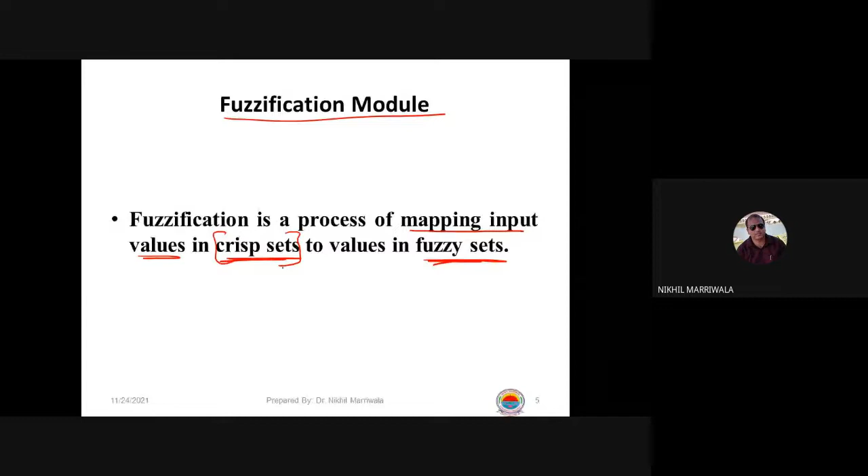So what we are talking about is the fuzzification module. Fuzzification, as I told you, is a process, and we will be using it. In simple terms, it talks about mapping input values in crisp sets, right? So again, I told you that we will be talking about set theory. So the input values in crisp sets are mapped to values in fuzzy sets, right? So fuzzification basically performs this kind of an action. The fuzzy sets are generated out of it, and then the next process is followed using this knowledge base.

Now, the knowledge base is basically divided into two halves: the rule base and the database. The database is something that we always keep on increasing and improving each day. It provides different types of definitions or linguistic controls, I should say. Say, for example, I say today's weather is very cold, right? So normally when I say this term cold, everybody can relate that we would require some woolen clothes to wear, right? Or we require something hot. So hot or cold, these are some linguistic functions.

Now, how the machine would understand these linguistic functions is one of the important aspects of fuzzy logic based systems, and how data can be manipulated using these values. So for somebody, a 20 degree centigrade temperature will not be that cold, right? For somebody who's staying in the very south, 20 degrees is a cold temperature, right? For people staying in the north, 20 degrees is a normal temperature because we are used to these conditions. So it can be cold for somebody, hot for somebody, moderate for somebody.

So how does the machine distinguish, and how does the machine help in this kind of a scenario? This is what we need to understand. And when you see so many situations coming into picture, you realize that this concept is something which is to be worked on, right? And fuzzy logic provides a wonderful solution to all these problems, right? Then comes the rule base.

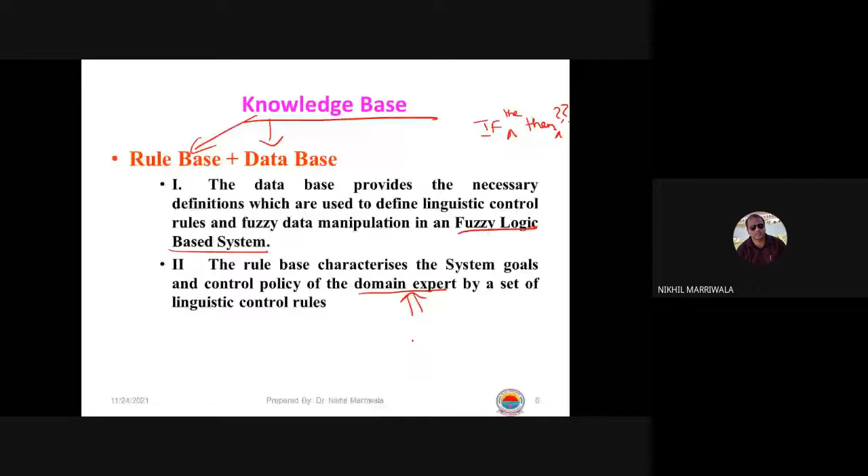The next important part over here is the inference engine. Now this is something that is inside the structure and manipulates the data that you have created. So this is just like a human brain. Whatever information is received, the decision-making capability is with the inference engine. So it performs the decision-making and then manipulates the data accordingly. As a human brain does, based on the inputs received from the fuzzifier and the set of control rules that it has, the inference engine aggregates.

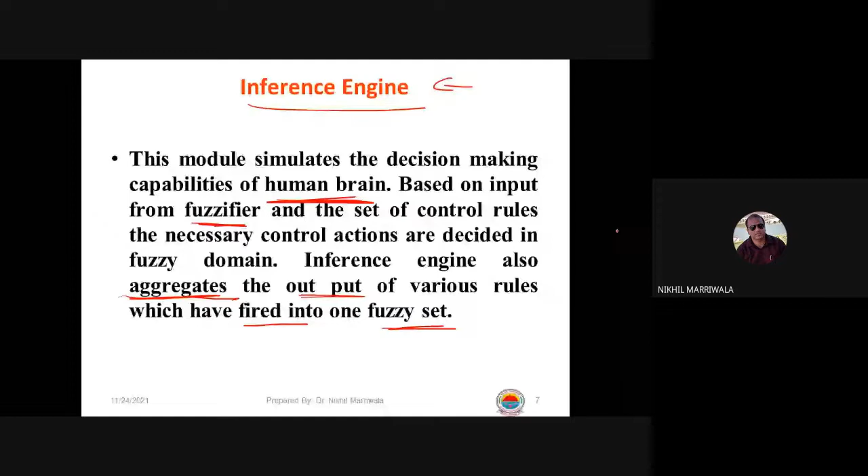So this is the word. It aggregates the output of the various rules, whatever rules are there, and which rules have fired into the fuzzy set. We will see what this firing is and what rules are used. So once the rules are fired, the last process is performing the reverse operation of fuzzification, that is the defuzzification module. Now, the module performs the following actions.

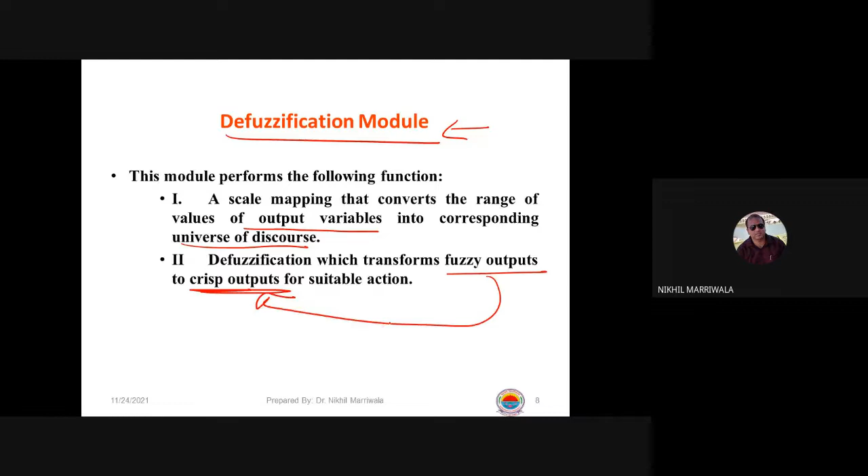A scale mapping is used which converts the range of values of output variables into the corresponding universe of discourse, and defuzzification is basically the reverse process of fuzzification. So it is transforming fuzzy outputs into crisp outputs. Earlier we had the crisp sets converted into fuzzy sets, right? Now this is the reverse operation, fuzzy outputs into crisp outputs, and that is what I wrote in the block diagram. You will be getting the crisp output for your purpose. I hope you have followed till this point, and if there is no doubt, I'll just move ahead.

So what are the different defuzzification techniques that you have? Different defuzzification techniques are center of gravity or center of area, center of sums, height defuzzification, center of largest area, and the min-max approach. So these are the different defuzzification techniques that are used. I still hope that you are following this. Anything you want to ask? So these are all mathematical functions.

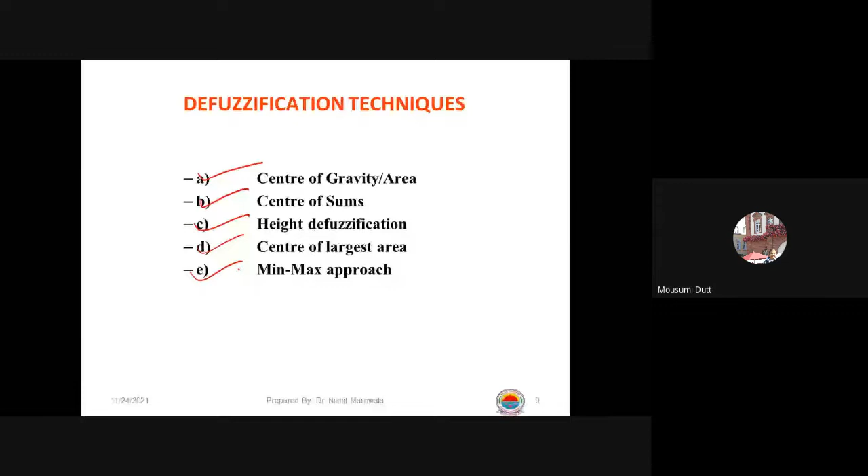I'm still waiting for some replies. I don't know why today you are so silent. You can talk to me. Yes, sir. Right, that's good to hear some voices coming in. Actually, they are writing in the chat box, responding there. Okay, I'm not able to see the chat box because my screen shows the PowerPoint presentation only. So I would request them to kindly switch on their mics. Participants, please unmute and respond.

So I need some answers from you. Can anybody just describe what a greenhouse structure is? Because you have heard about this thing. Anybody you can talk about a system of greenhouse? Anyone who can just give it in one line, or should I go to chat box to see the thing?

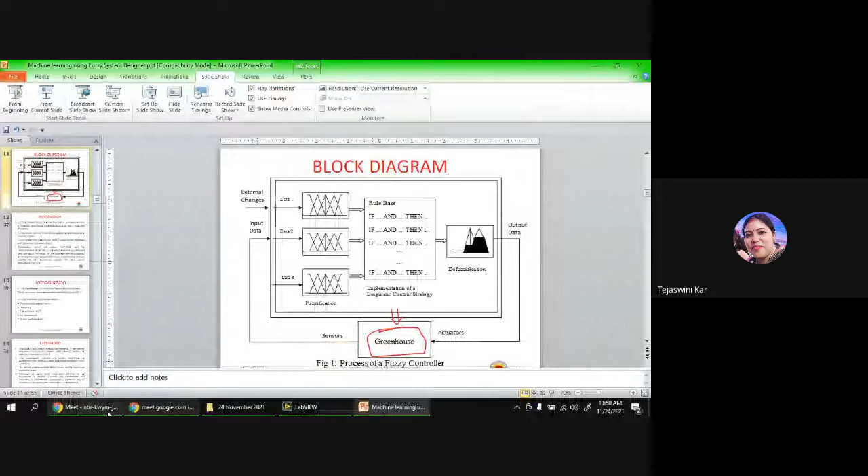A greenhouse structure. Okay, nobody is still answering. So I think the first lecture has hampered your. No idea, actually. No idea. Okay, no idea. Okay. I thought everybody must be knowing it. Nevertheless, okay, I'll just introduce this to you.

So the greenhouse basically is an enclosed environment, right? Again, I'll write it over here. It is an enclosed environment where you grow plants, right? So a man-made structure, enclosed structure, where growth of plants is basically the aim for us, and we provide a certain kind of environment where the plants can grow very effectively, right? So I hope you have understood that, and you have seen this around you. I hope you followed this now, right? Yes, yes, sir. Right. Thank you very much.

So, for this particular aspect, many theories have come how this greenhouse can be very effective. Say, for example, you are staying in a particular location and you want to grow mushrooms over there, and it is not conducive to grow mushrooms at that point, right? So, what you need to do? You need to create an artificial environment to make sure that the mushrooms or any crop is growing, right? So for that particular purpose, a greenhouse comes into picture and provides the solution. And this is what we are looking forward to designing today, right?

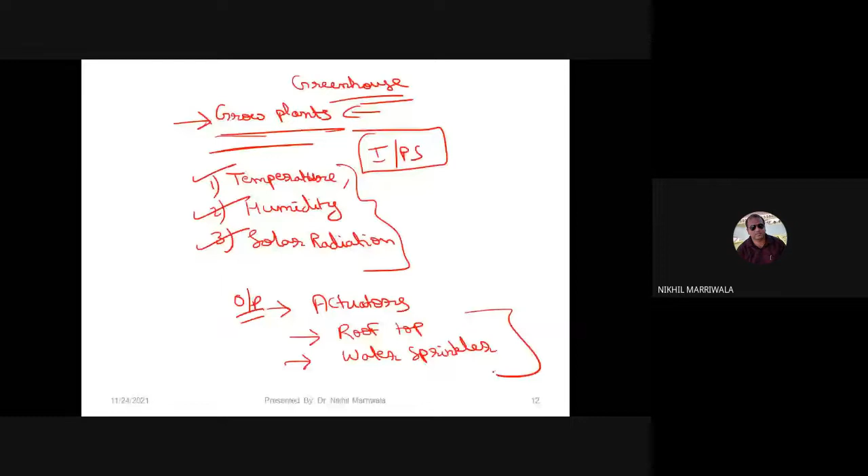So these actuators are what? They are basically, see, the roof of this particular greenhouse can be opened and closed for the solar radiation to come or the air to flow in, right? So roof top and the water sprinkler. These are two important things that are used in a greenhouse structure, and they will automatically be controlled by this fuzzy system designer that we are trying to design today, right?

Is it okay now? Have you understood the problem? Yes. Right. So what we are doing is we are trying to use fuzzy logic for solving this complex scenario of greenhouse structure, where we'll talk about temperature, humidity, and solar radiation as the inputs, and two outputs that have to be controlled, that is the water sprinkler and the positioning of the roof. Right. I hope you have understood this and you have followed this.

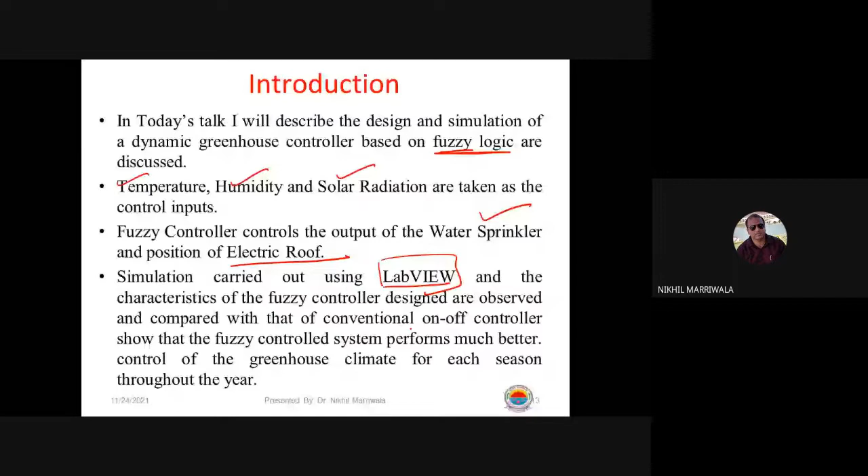Now we will be using again LabVIEW today to design this fuzzy system designer. We will be replacing the conventional on-off controller, right? Now I'll tell you that in greenhouse structures, normally there are people who control it, go with on-off controllers, and then the roof moves or the water sprinkler starts, right? So we are replacing it and we are automating the process using AI.

Now yesterday people were asking what is the difference between machine learning and AI. Now I'm trying to give you that, right? So we are implementing the technique, right? The artificial intelligence is being given to the machine, where we are referring to fuzzy system structure. So fuzzy is one of the techniques, right?

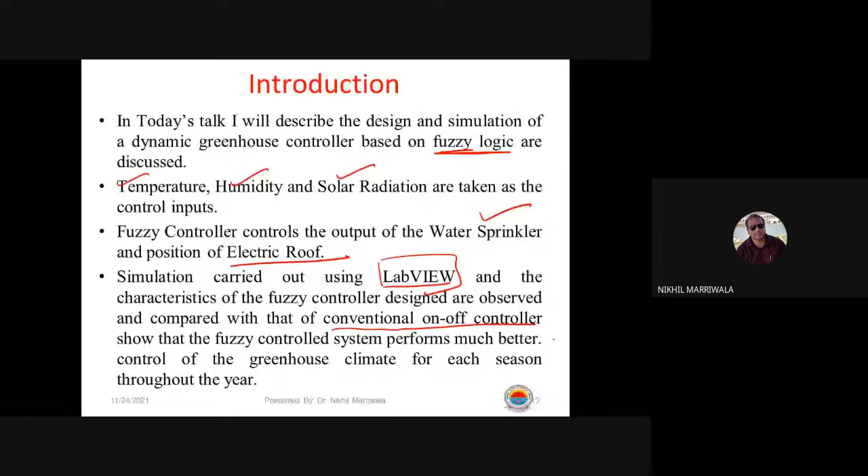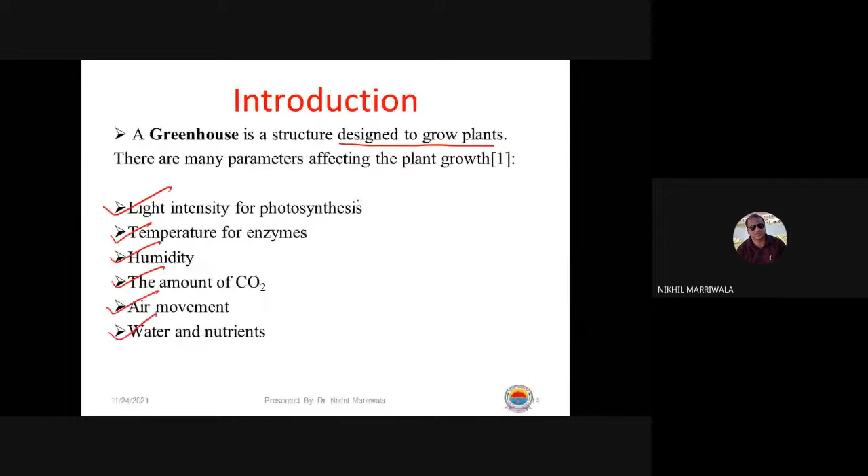So again, greenhouse is what? It is basically an enclosed structure designed to increase the growth of the plants, right? Many parameters I've already talked about: light intensity for photosynthesis, temperature for the proper growth of enzymes, right? Similarly, humidity, the amount of carbon dioxide required, air movement, water and nutrients. So all these are factors. How you can control it? Because we have already enclosed it inside a particular structure. So that is referred to as a greenhouse, right?

So why we are doing it? Because we want to replace the on-off system with an automated structure. This is a highly non-linear structure, very complex problem, right? Very complex in nature, because we're dealing with something living, right? So it is very highly complex, and we want to help the farmers to make sure that they produce good output, right? So we are using a fuzzy logic controller for this particular purpose, right?

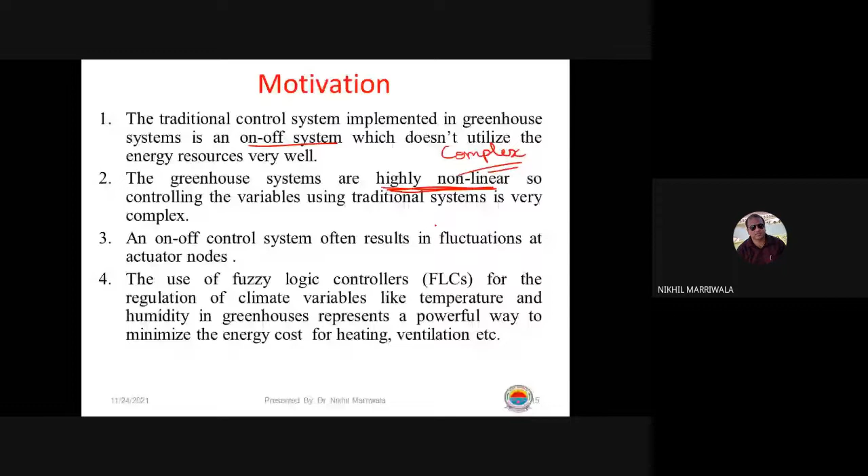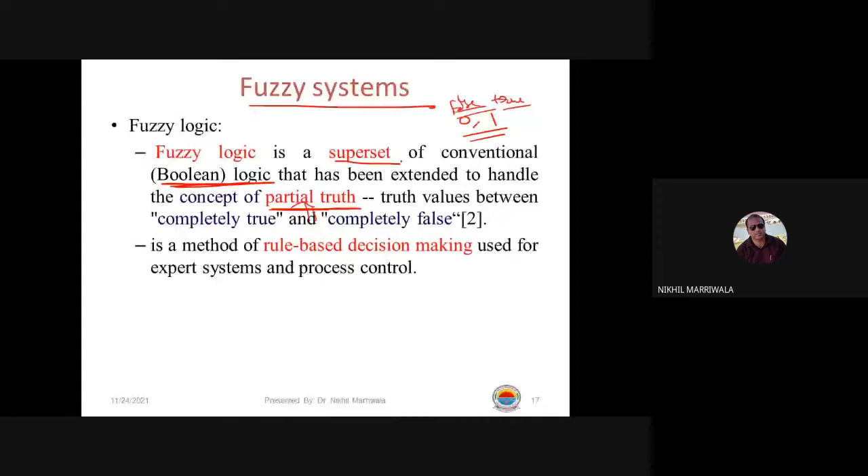So fuzzy logic basically, just a simple aspect, is a superset of conventional Boolean logic. I've already told you, right? The Boolean logic was referring to zeros and ones, but fuzzy logic would refer to intermediate values also. For example, partial truth, right? So this is called false and this is called true, right? Everybody knows this. Completely true and completely false, we understand. But what about partial truth and partial false, right? So now this is the problem. So this is basically why we are referring to these fuzzy systems, and they are very good in entertaining all these types of issues, right? So I hope that you will enjoy making these.

So I've already told you that we are dealing with linguistic variables as far as fuzzy logic is concerned, and these linguistic variables are very simple. Say, for example, in temperature, I talk about freezing, cool, warm, and hot. We will talk in these terms only, and you'll see that the machine would understand this, right? So this is the beauty of the system. Like speed is slow, normal, fast. So you can talk in linguistic fashion, and rules will also be made in linguistic fashion only, right?

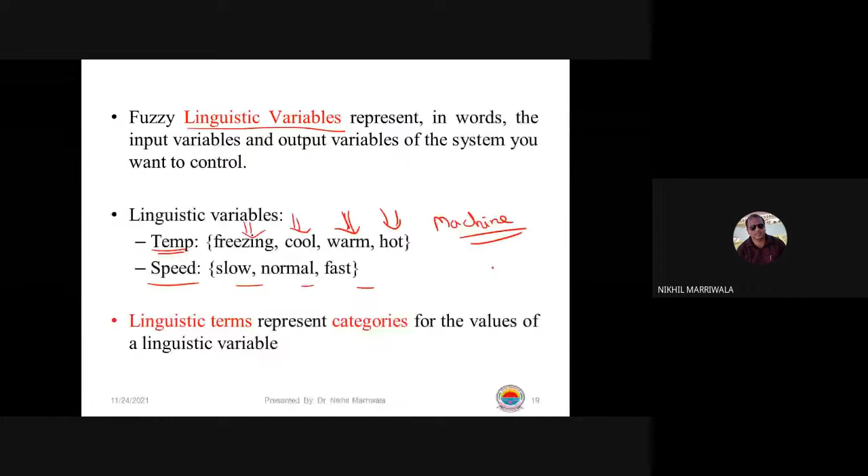Right. So what are the rules? Again, I told you, if-then. So if current temperature is cold and desired temperature is moderate, then heater setting should be low. Normal talk that we discuss among each other. Say today is very hot. So what do you want? We require an air conditioner, or we require a fan, right? So today is very cold. So what we require? We require this thing. Then this should be the output, right?

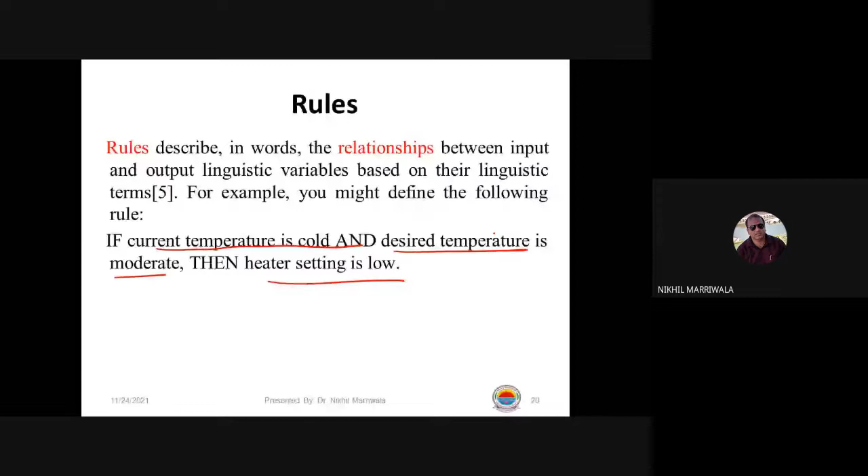We draw these kinds of systems, and then the outputs of this particular structure are selected according to the values that you have given, or according to the rule base that you have formulated, right? So we will be trying to design this structure.

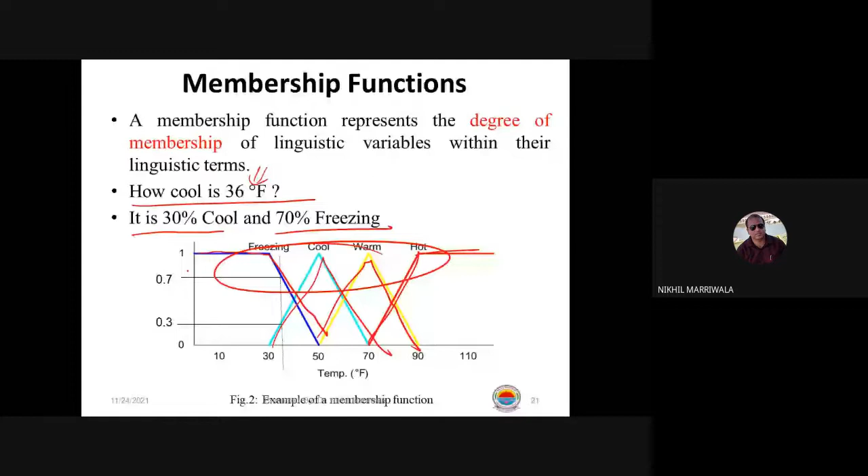Now what I'll do is straight away move to the LabVIEW part. I hope everybody has downloaded and installed this. I'm assuming this for everybody. Again, Control N would do what? Control N would do what? New VI. I hope everybody remembers that, right? Is it a very new topic for everybody?

Yes, sir. Okay, okay. So, thank you for answering, Tejaswini ji, for this particular purpose. But see, I'll make sure that it becomes very easy for you.

Bonda ji is saying one example for greenhouse structure, shade net structure. Yes, shade nets, but sir, that is not a greenhouse. So there is a difference. Again, I repeat, greenhouses are very big farms, right? You normally see on roadsides, people have developed some nets and are growing some saplings, right? So that is a very small structure, but they are not controlling the rooftop because it is basically enclosed.

Now, greenhouse is different, right? It is an automated structure where roofs can open, water sprinklers start on their own, right? And several other parameters can also vary in that case. So don't confuse it with the normal shade nets that you see. That is not a greenhouse. Again, I repeat, a greenhouse is a very big farm, and that too enclosed, where roofs can move, right?

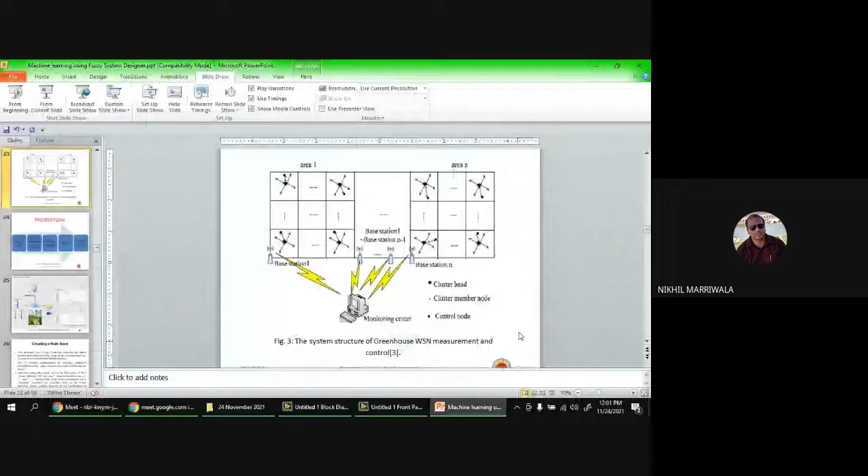Excuse me, sir. Are there any research papers related to this LabVIEW implementation? Yes, ma'am, I'll show you all those papers. But right now, I'm talking about the problem identification, right? So yes, there are many papers based on this. LabVIEW implementation I have not seen. In MATLAB it was there, but LabVIEW implementation we have not seen. Ma'am, there is nothing much to differ in MATLAB and LabVIEW.

Again, I repeat, MATLAB is good for those who love to code, right? But people like me who don't like coding prefer graphical programming. So is it like a tool which is easier than MATLAB? What do you think? Madam, again, it depends on your work. Say if you are comfortable enough in writing the program.

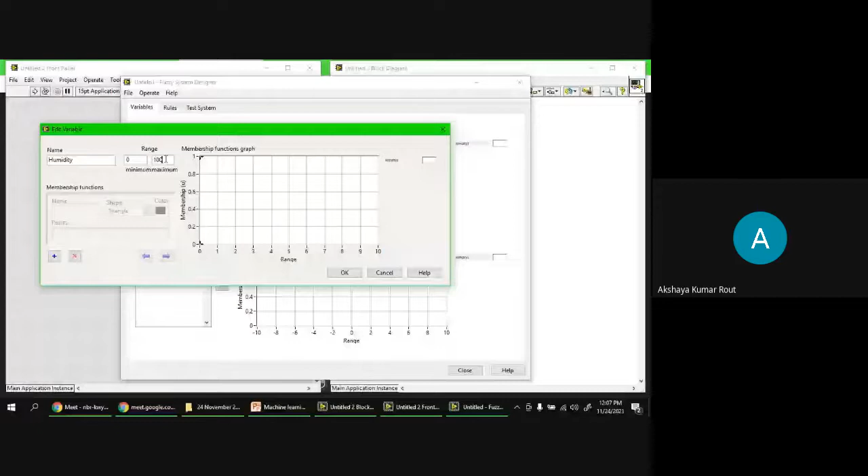Similarly, the second input variable was what? Everybody can answer this. I think humidity, right? So I need some yes and no from your side. Humidity. Is everybody available here? Yes, sir. Right, humidity, and the third one was solar radiation that we had decided, right?

And the range again from 0 to, say, 15,000. I'm taking this in lumens, right? So 15,000 lumens or even higher values can be taken. This is just the range. So temperature, humidity, solar radiation, 3 inputs. And what were the outputs? Output variables were water sprinkler. I hope everybody can answer this.

Water sprinkler. Again, I can take a range from 0 to 100, that is opening and closing of the water taps, right? And similarly, roof, electric roof. Why am I calling this electric roof? Because it is controlled by some actuators which are electrically controlled. So on-off controllers have to be replaced here. And I'm talking about the range of 0 to 100 again. This is just a rough idea. Now we have given the input variables and the output variables, right?

I don't know whose mic is still on, but if you want to ask something, you're most welcome. Akshaya Kumar ji, I think he's accidentally switched it on.

We have just given the input and output variables. Now there are DAQ cards by which we could have interfaced them directly, but right now we are taking these inputs. These input variable parameters are already available in that worksheet, right? Temperature, humidity, solar radiation, keeping in view this greenhouse. We have just selected them.

There are more parameters. You can add more inputs. But these are some of the parameters that actually affect the growth of the plants the most. So we're trying to design a system with temperature, humidity, solar radiation. I could have added carbon dioxide level also, CO2. Right, so you can add input variables, and you can remove them if they are not actually affecting that particular plant growth. Nevertheless, we've taken these three, and the two output variables used are water sprinkler and electric roof, right?

So now the next part is you need to give them some membership functions. This is what fuzzification is, right? If you have to give membership functions to temperature, like the way we were talking about linguistic variables, I click on add, and a membership function comes up.

A membership function is nothing but, say, temperature is freezing for me, in normal terms, freezing, right? There are different shapes I can decide for the membership function: triangular, trapezoidal, singleton, sigmoid, Gaussian, whatever you want. I just selected the triangular function right now, and freezing means -10, 0, and say 10 degrees for me. Just a rough idea, rough data. Okay, you got it?

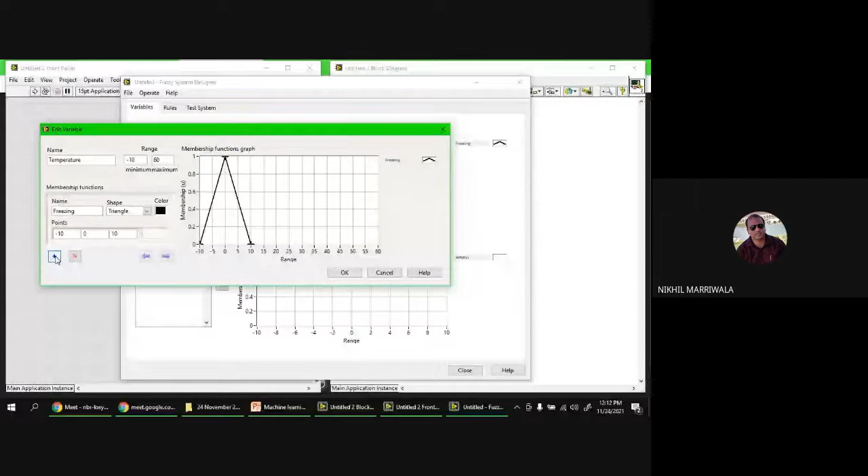Similarly, I can add another membership function. Now it is cold for me. So what is the range of the cold? This time I can change the color to make sure that the lines look different. Sir, excuse me, sir. Yes, yes, please, ma'am.

Sir, can you please repeat the utility of this membership function? What you said, ma'am? I just couldn't follow that. Can you repeat? Yeah, could you please explain this membership function? What are the utilities? Why we should include the terms as a membership function?

Ma'am, because we are talking about some linguistic variables to be introduced. So either you could have given real-time data to the system, right? Or you can talk about these membership functions where you describe what is the temperature, whether it is cold, normal, freezing, or warm. So based on those inputs, your system would behave. Do you understand that now? Yes, sir. Right. So we are trying to give that input to the system.

So one thing that we understood was freezing. Another thing was cold, and we have just used our database or our own knowledge to make sure that from -10 to 10 it is freezing for us, and from 5 to 25 it is cold temperature for us. So this must be cold for the plant also. Now do you understand that? Yes, sir.

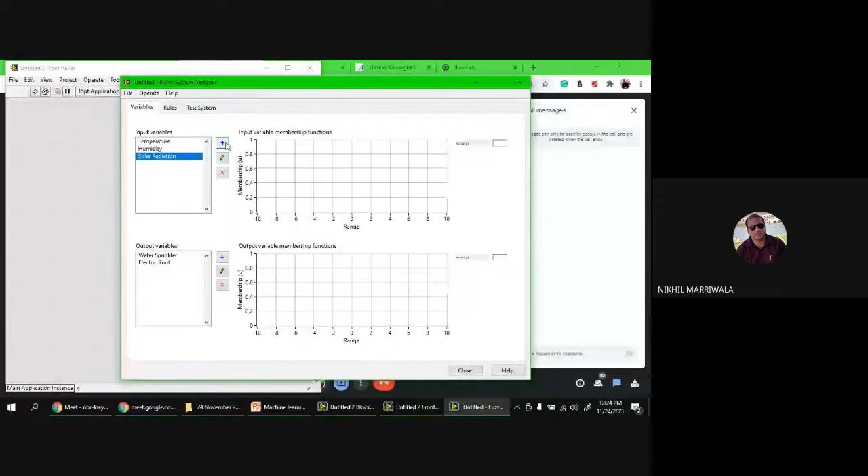So temperature and humidity have been given some values over here. Now solar radiation is the one that we need to work about. So what is solar radiation over here? Again, click onto this solar radiation: dark, medium, and light. So I take the variables dark, medium, and light. What is the range of dark for me? Dark can be 0 to 3000 lumens to say 5000 lumens. So this is dark. Then enough sunlight is coming, right?

Similarly, medium or moderate sunlight is coming. I can use any terms, moderate, and again I can make some color changes over here. Rather than typing, I can move this also; it can be a little faster for me. So I have taken this range as moderate, and then add another one to create high. So say I again set a Gaussian function, select this color over here. So this is high range for me, just a random value again. I hope you followed this.

So temperature, humidity, and solar radiation, according to our own knowledge, we have given some input membership functions according to what we understood, right? Is there any problem till here?

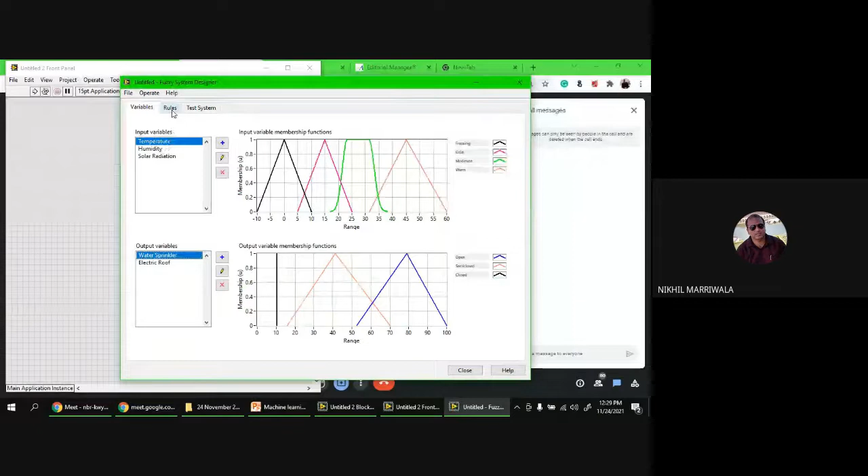So we have given the membership functions to all these input and output variables. So this is the main part that we needed to do. Now, if you've understood, I can move to the next step. The next step is very interesting, right? Now here AI, artificial intelligence, would come into picture because the complete data is there. Database has been utilized. Now I told you that we have to implicate these things, right? So rule base has to be created.

One way to create a rule base is click onto this add, and it says if temperature is freezing, water sprinkler is open, right? So you can change this rule to water sprinkler is closed. But where are the other antecedents? So you have to add them, right? Add them as if humidity is high, let's say humidity is low over here, and solar radiation is dark, or say solar radiation is moderate. Then what are the consequences, right? So this is how you make rules.

Again, it is being done by you people, right? Your intelligence. Now we don't want our intelligence to come into picture every time. You can create n number of rules, right? Clicking on to add, you can create n number of rules. But I don't want this thing. In this case, I delete all the rules, but I want the system intelligence now to come into picture according to the data that I've given it.

So the best part is go to operate, click on to pre-generate all rules. Now, this is the phenomena, pre-generate all the rules. And when you click on to pre-generate all the rules, you will be shown that 36 rules can be generated for 3 input variables that you have given, right? And what are the antecedents you want to use? That is and, minimum, and product, or maximum, or probabilistic.

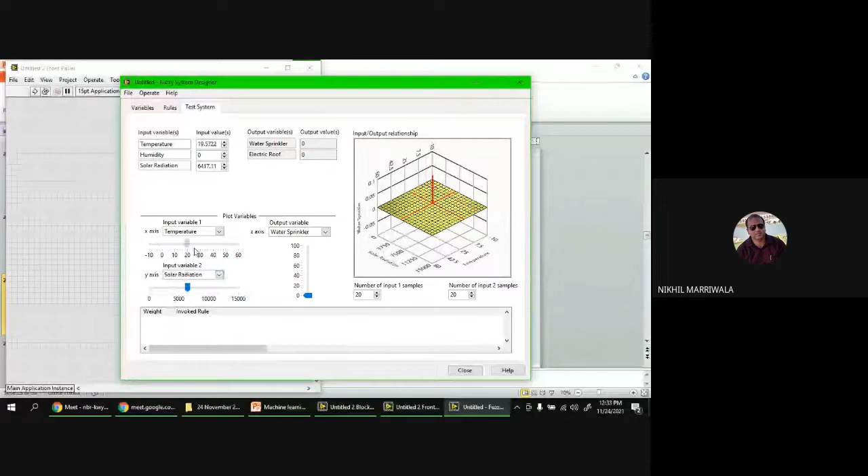The next part I need to do is move to this test system, and when I move to this test system, you will see that the 3 inputs and 2 output variables are shown over here, and you have the input variables and output variables over here, right? So how this thing would change, I'll just show you, right? So you're able to see the output part changing according to what we want. Are you able to see that?

Yes. Yes, yes. And in the lower half, you are able to see the fired rules, right? The rules which are fired according to the input values given. So you can change this input also, and you will see some values changing accordingly, right? Now this is the automated process.

Is it okay? So there is some weight also coming. Weight? Yes, yes. So it has computed the weight according to the input that you had given in the rule, center of area. Okay, that is automatically generated, right? That is automatically generated now. Right? Yes, sir. I hope you followed this.

Okay. Actually, the output variable is electric roof. So how is it interpreted from that output graph? It can be changed with water sprinkler also. You see the value changing over here. Right? I could not interpret actually how the graph indicates water sprinkler or rooftop. See, if temperature is 20 degrees and humidity is 65, then the water sprinkler output according to the rules that we have created should be at this point. Now this is being done automatically. I'm not controlling it. Now do you understand that?

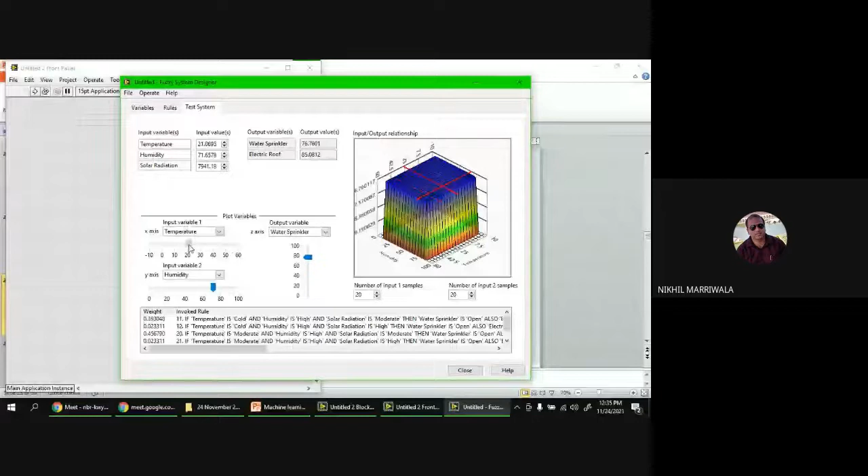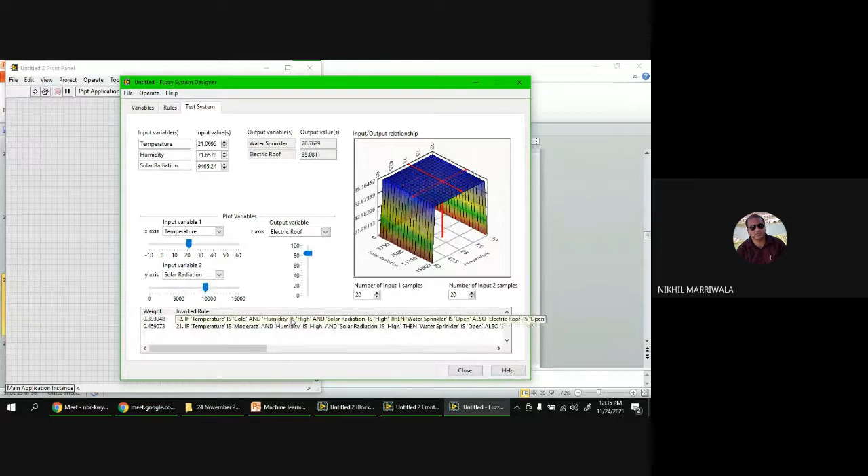Okay. Right. So if temperature is this and solar radiation is this, then what is the value of the electric roof? It is this. It will keep on changing. You see the value changing over here, right? Okay. And rules getting fired. Now, if you want to change something, you can go to a particular rule and change it. The electric roof is 80. So please, previous one. Previous. Yes, that one. Please go ahead. This one.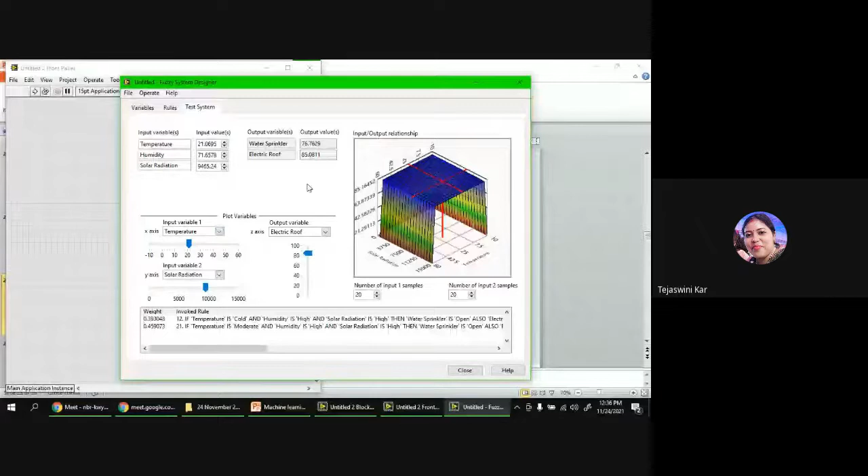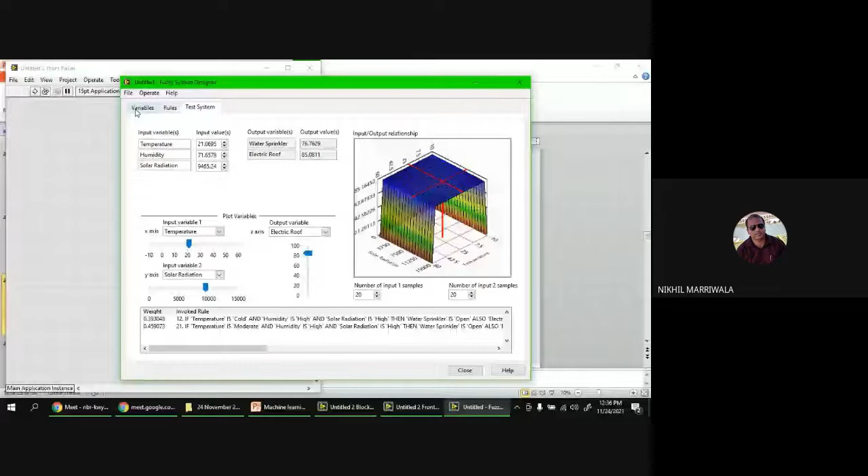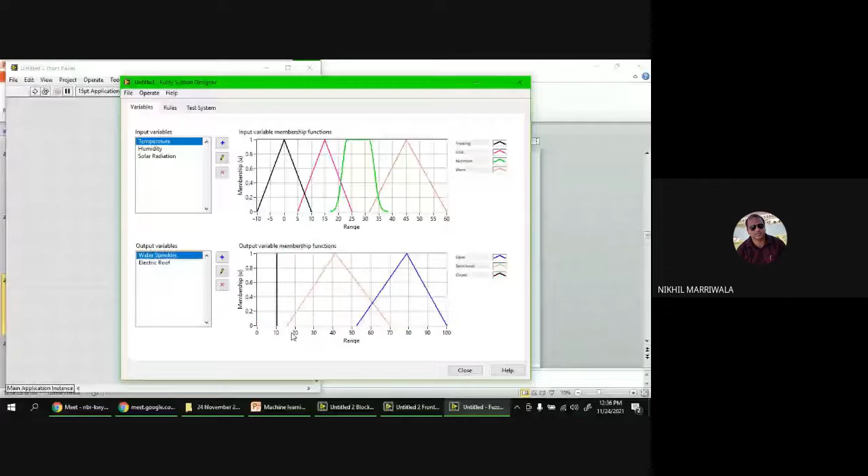Here, as it is indicating, electric roof is 80. What does it mean? Please see here. Here, we had given that electric roof 80 means a percentage of opening. Yes, yes, it is percentage of opening. Okay. Similarly, water sprinkler is percentage of sprinkling, the quantity of water. If it has to be, the valve has to be open or closed. Okay, okay. Thank you. Right. I hope you got it now. Is it okay? Yes, sir.

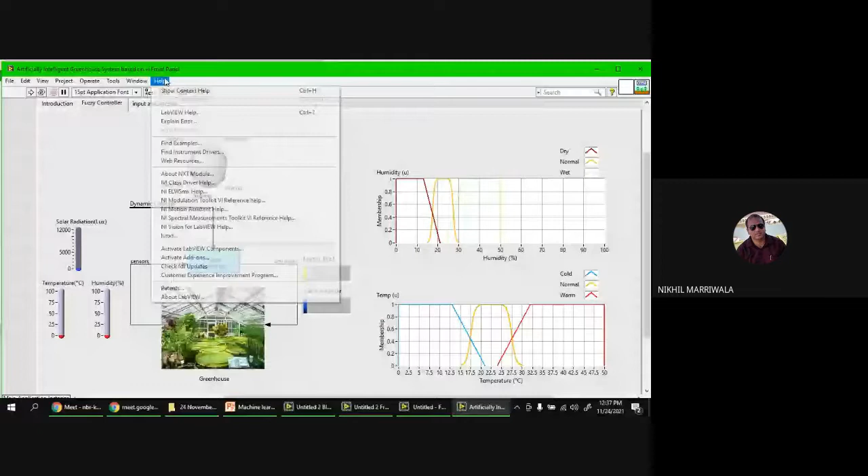Now I can use this entire information in the system and generate a system. Right now, what I have done for you people is I have created this particular structure for you. We have created this fuzzy controller because there are 4 seasons: spring, fall, winter, and summer. Before that, I can show you another example of similar sorts where I will control it in real time. Sir, you put a greenhouse image over there in your VI? Yes, ma'am. There is a greenhouse image. This image has nothing to do with anything, but it gives a good representation, and this can be easily done in LabVIEW. That is why we are using this software, right?

Okay, these images are already there, or you are importing it from some other source? No, I've just taken it from Google, ma'am. You can take any other image also, no problem. Any image can be imported and put here. Any image can be used now.

Okay. Right. Now I'll show you the implementation of the same thing that we have designed, right? So when I run this, just have a look. The temperature and humidity, right? I'm varying these two. I hope you're able to see the variation in the output.

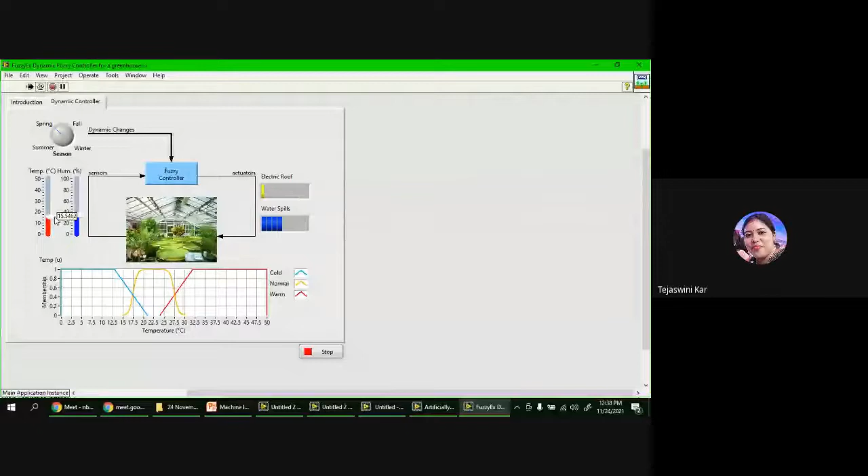Are you able to see that? Yes, sir.

As I'm raising the humidity, the water spills have to go low, and they are behaving in similar fashion. If I increase the temperature, the electric roof opens and water spill also increases. If I decrease the temperature, right? So they are behaving in this fashion. Now this was spring season. Now say the season changed to summer, and in summer season the temperature rises. Then what happens? So we're talking about some extreme conditions over here. So the output is behaving accordingly, right?

I hope you're able to see this. Yes, sir. I can change it to winter season. Temperature goes very low, humidity is still high. Then what happens? Or humidity also goes low. Then what happens? So you can all see this. In winter, say suddenly temperature crosses 20 degrees. So it is very high for that, so plant growth can be hampered. So if this is hampered, electric roof and water spills will play their part in this.

I hope you have followed this. You have understood what I'm trying to say. Any problems here? No, sir, it is fine.

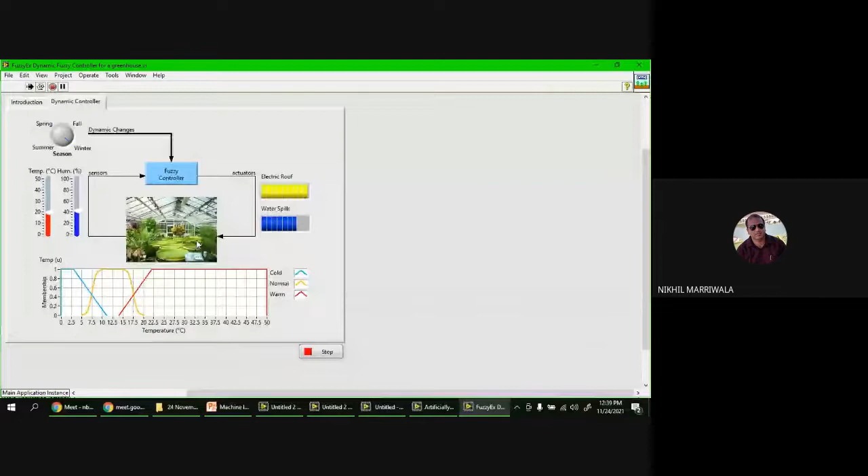Great. Now see, a similar thing can be done with a real-time system. The third input was missing there, this solar radiation. I've just taken it here. Now when I run this, I've just used a structure which is giving input from my fan over there, right? The humidity, temperature. You can see the variation happening as they are moving, and this is the output recorded. So this can be continuous monitoring of the greenhouse structure.

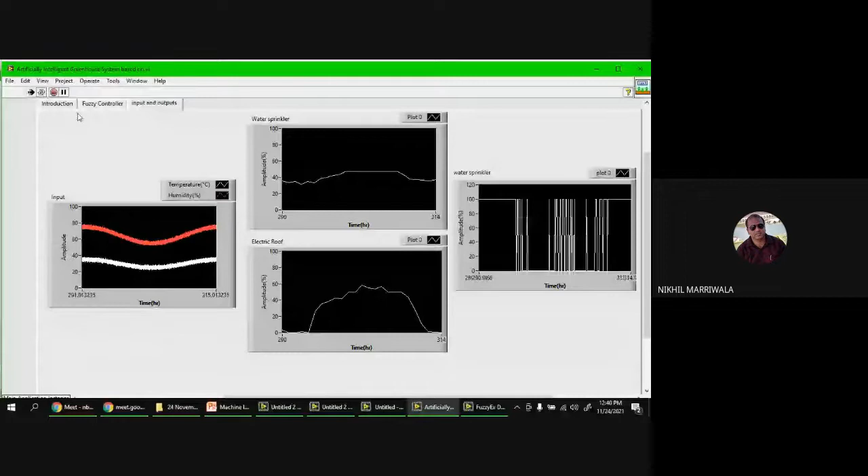As soon as there is a variation in the output, you see the electric roof being opened and closed, and this is the output received, right? So water sprinkler also on and off. So the complete structure is being recorded over here, and you can work with it. I hope you have understood and followed this. Now, both the things can be done in real time.

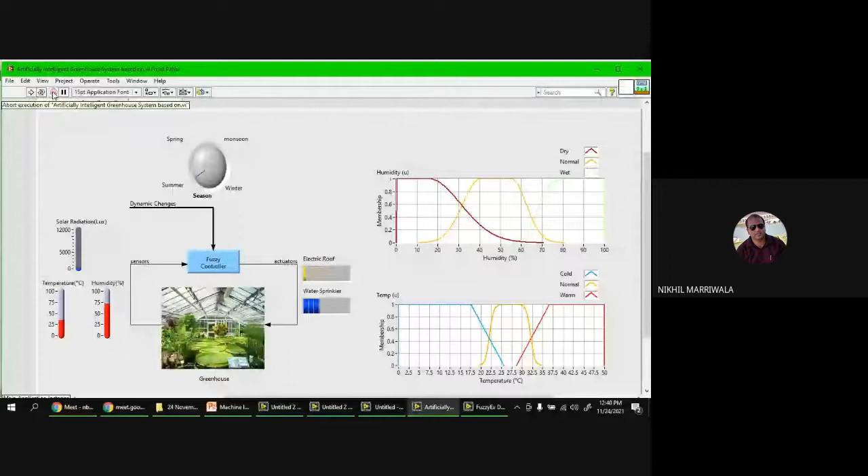Is it okay? I hope you have followed this. Everybody, I'm asking all of you. Yes, sir. Any doubts?

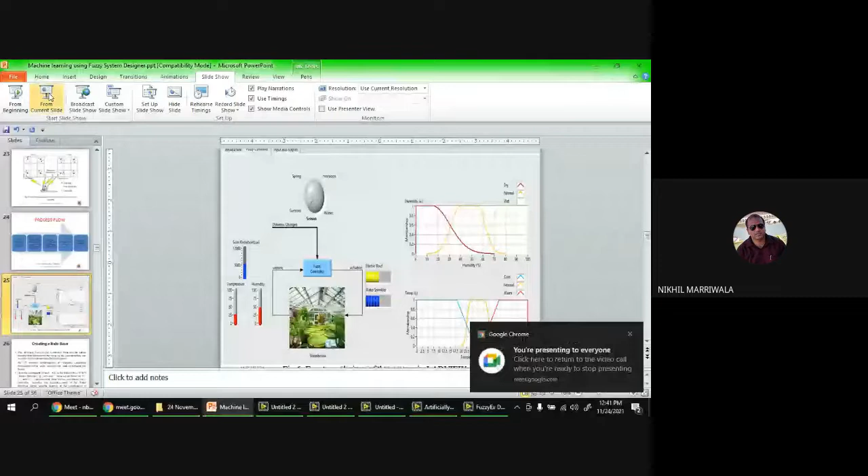So my aim today was to give you a complete hands-on on this particular structure so that you people understand the importance of what we are trying to do. So this is one of the easy parts in fuzzy systems and fuzzy system designing. The difficult part, I think, is setting up the rules. Pardon me? Once we have the rules... the difficult part is the setting of the rules. If we have the rules with us, then we can come up with this. Yes, so that is the main part. That is why data is important. Whoever has the data is the leader, right?

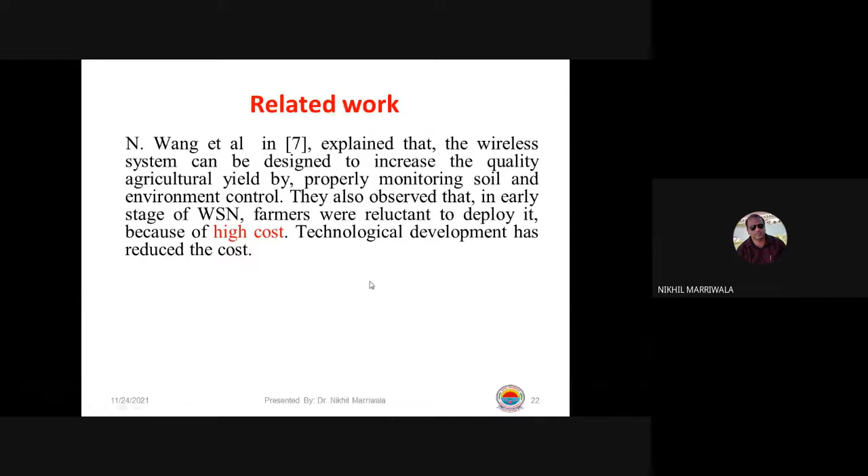These days. So somebody was asking about the publications and the papers, right? So I'm showing you a few papers. One of these papers is by N. Wang et al. So he had shown this kind of a concept over here. I hope my screen is still visible. Yes, sir. Thank you.

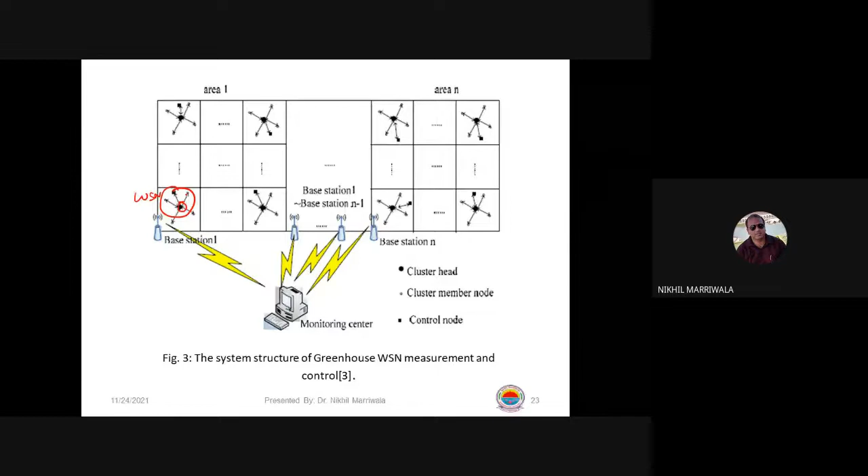So see how interestingly these systems have been integrated together. This is a wireless sensor network, or WSN. This is the cluster head, and these are different sensor networks gathering information from the environment. These sensor networks are connected with each other in a particular area. Similarly, the areas are multiplied over here, and they are connected with their individual base stations, which send the information back to the monitoring station.

Now, these monitoring stations are the ones collecting the data, storing it, monitoring and manipulating the information, and then supplying the information back through these sensors to the farmers or to the concerned person. So this particular structure is about implementing a wireless sensor network in a particular region to monitor the soil condition, the temperature, the weather, and then what farming needs to be done.

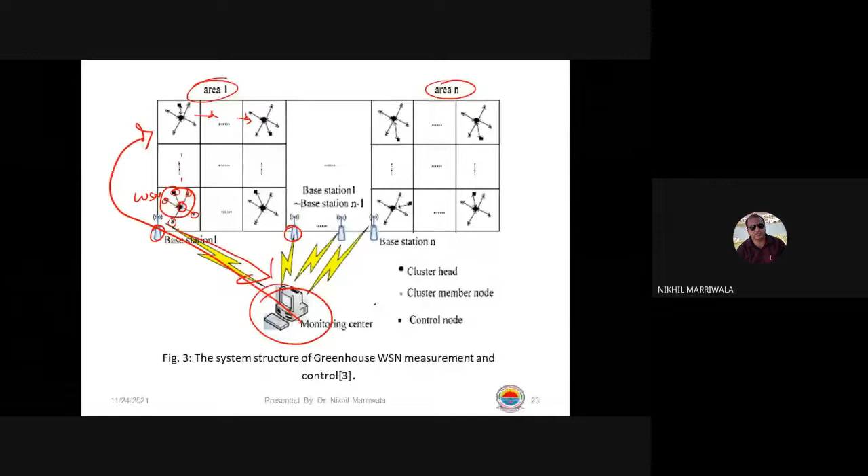So this is one of the papers they have worked on, ensuring greenhouse WSN measurement. We have already designed this. I have shown you how different seasons can be used, and how the fuzzy controller can be automated. So now there is no manual control over here. Everything is automated. As soon as there is change in humidity and temperature, the electric roof and water sprinkler actuators work accordingly. So a lot of power has been saved in this kind of scenario.

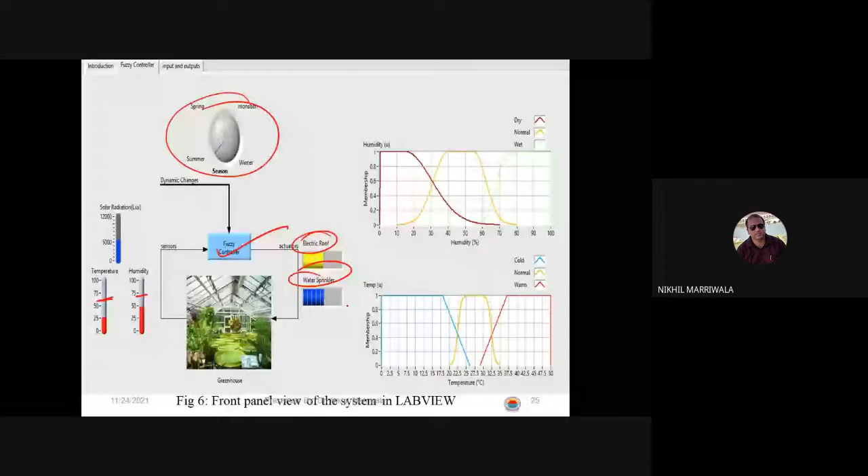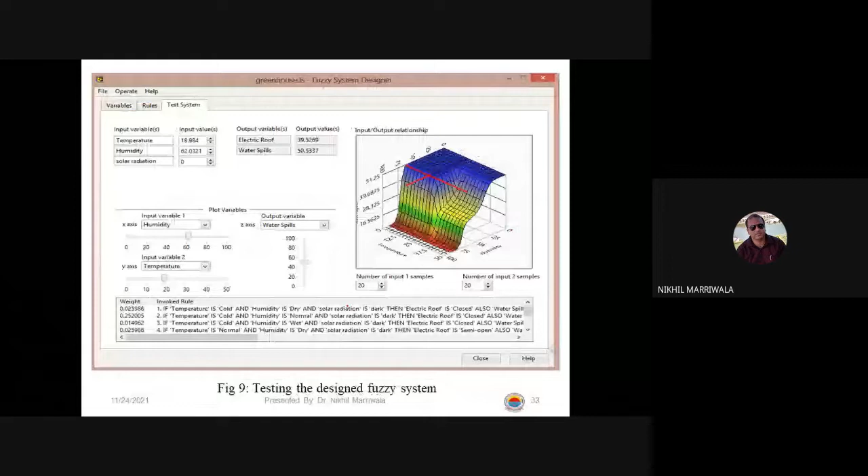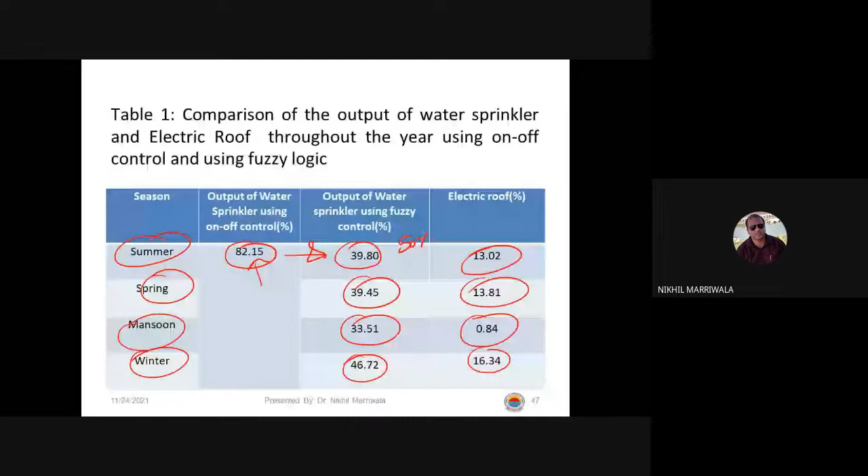But whereas in different seasons, the output changed. Similarly, electric roof. So there was almost a 50% reduction. Now you can see this, almost more than 50%, right? So more than 50% reduction in power was there as far as the fuzzy system structure was concerned, right? So I hope everybody can very well understand this.

So how important it will be to utilize these artificial intelligence techniques in building certain systems. So you can build many systems over this, right? You just need to understand the problem, understand what are the inputs and outputs for these systems, and then you can work with them. Is it okay? Yes, sir. I hope everybody has followed this and there is no confusion as far as these systems are concerned. I hope everybody has followed this.